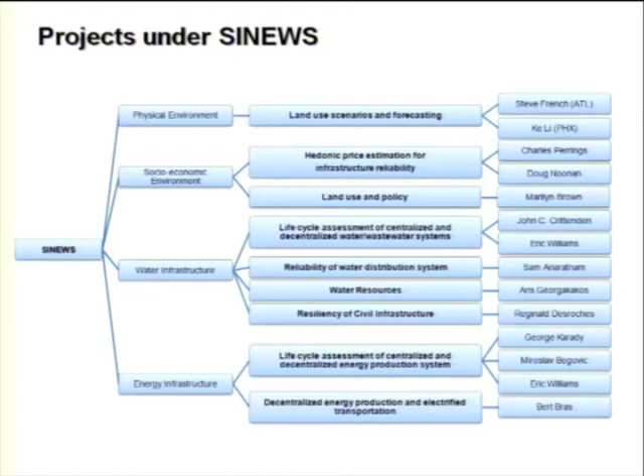There was a study conducted by the National Center for Atmospheric Research. DOE commissioned them to run their climate model and ask the question: how much would we have to reduce carbon emissions to avoid the most catastrophic problems associated with climate change? And the answer was 70% by 2100, 30% by 2050.

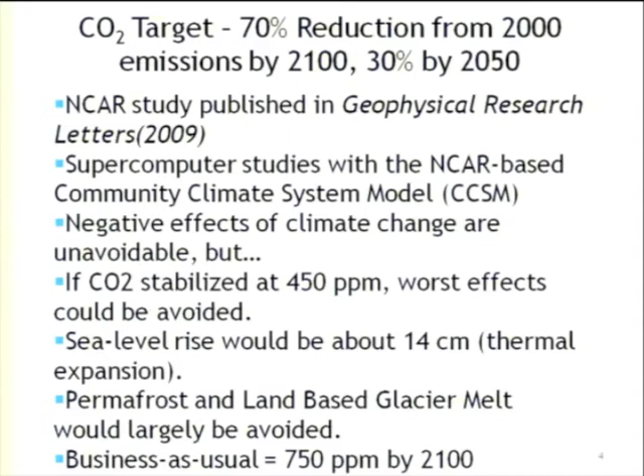What that means in terms of energy reduction is shown on this slide here. Right now we're about 13 or so terawatts. We'd have to reduce this to about 3.2 terawatts of carbon-based energy.

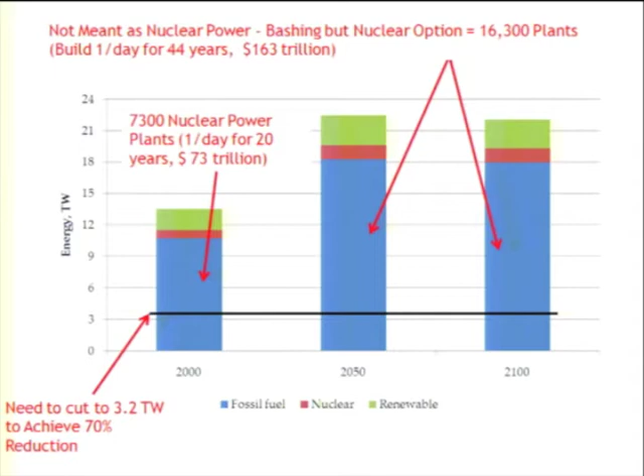Just so we have a good picture of the other side of the coin, it takes energy to create the materials that we use. You can see this here. We've got it broken down to oil and coal, and there's a magic gigaton line right there, 1 gigaton. Oil and coal is up here, steel, aluminum, copper, zinc, all the way down the chart in terms of metals that we might use. You may notice that I've also got here the amount of energy that's required to produce these materials.

One of the biggest ones up here is steel. Also over here I've got it broken down in terms of polymers. Maybe the numbers are smaller in terms of the production as well as the energy use, but I've reported them in here as well. For ceramics, taking a little liberty calling concrete a ceramic, you'll notice the energy use is quite high for that, as well as glass and bricks and so on. And then fibers and hybrids over here on the right. Maybe wood we could consider renewable, and some of the other materials we use in our society.

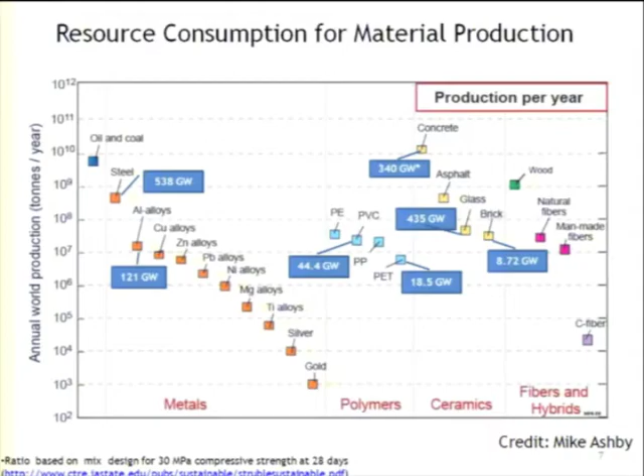This slide here, if we look at material use, we use about 14 gigatons of material, and the problem is only 5% is renewable. In the long term, it's going to all have to be renewable. And I'll call out one more from here - this is the carbon from fossil-based fuel, about 8 gigatons. So the gigaton problem really is about reducing the amount of non-renewables for the material use, and we have to reduce the carbon-based energy by 70%. So that's a tall order.

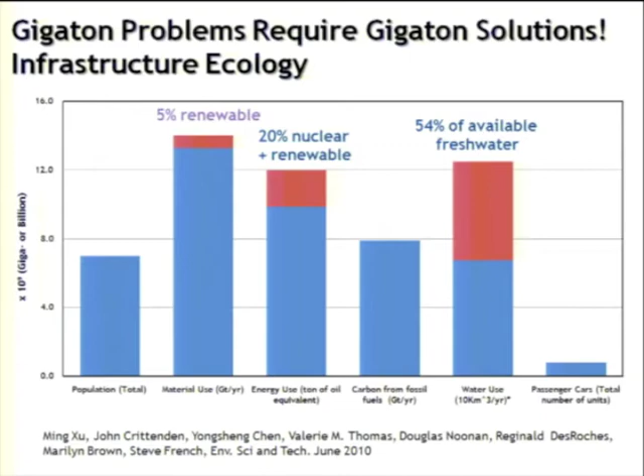And what I mean by a gigaton solution, or we need a gigaton solution for this, is that if we solve a problem - let's say we deal with 1 million tons rather than a gigaton - we need many, many solutions in order to have that add up to a gigaton.

Let's talk about material and energy challenges we're facing. I broke this down into two categories, energy and materials, since materials and their refinement require energy. The question we face in the future, and I don't know the answer, is whether it's better to develop green energy production systems or implement existing renewable energy systems.

There's a saying that fusion has a great future and always will. Maybe. Just to give you an idea what I mean there. And for materials, do we refine existing technologies that use less energy and materials? For example, can we improve concrete, plastic, steel, aluminum, glass production? Or develop new materials and greenfield technologies that use renewable materials? So this is a challenge.

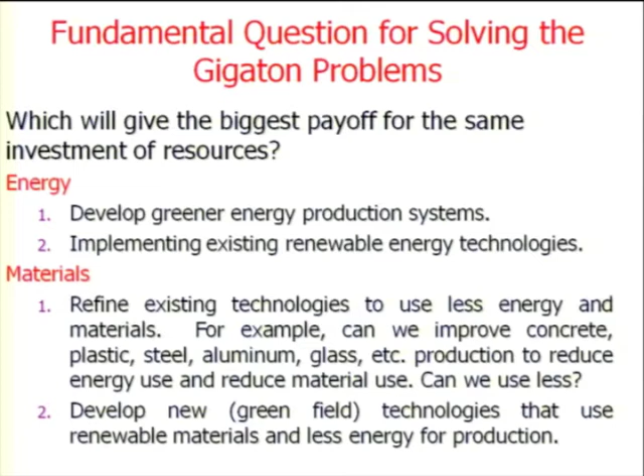I can show you a comparison that may be of interest when it comes to energy production for various industrial sectors. As you may know, China is rapidly becoming, or perhaps is, the factory of the world. You can see here the energy intensity in megajoules per dollar in various sectors, and across the board China is definitely using less efficient technologies in terms of energy use to create value in these sectors.

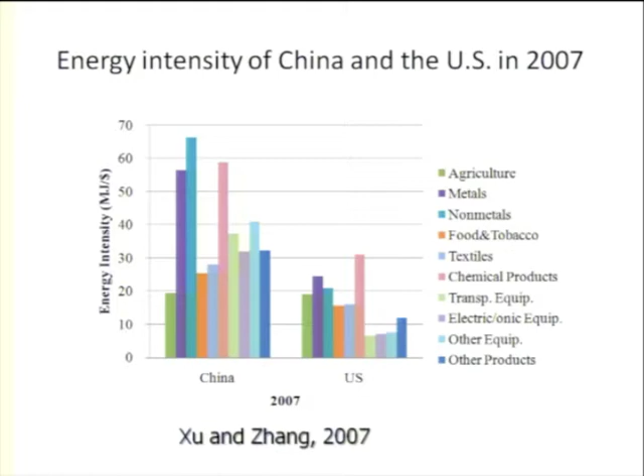This raises a question: how far can we go? Can we go even lower in terms of our energy investment to create dollars in these important sectors? Roughly speaking, it's about twice as much energy needed in many of the Chinese sectors. The only difference is agriculture, which is pretty similar.

Okay, so let's talk about how we might move forward to produce energy in a more renewable way. I'll get to the water energy nexus soon. There was a study reported in Scientific American about how we might create 11.5 terawatts of energy using wind, wave, and solar energy.

The numbers are here: 51% by wind, which would require 3.8 million large wind turbines, with 0.8% in place. It would require 1.7 billion rooftop PV systems, less than 1% in place. Concentrated solar plants, 89,000, plus some hydro as well. I labeled this World War II because the authors looked at the industrialization effort required, and it's equal to World War II.

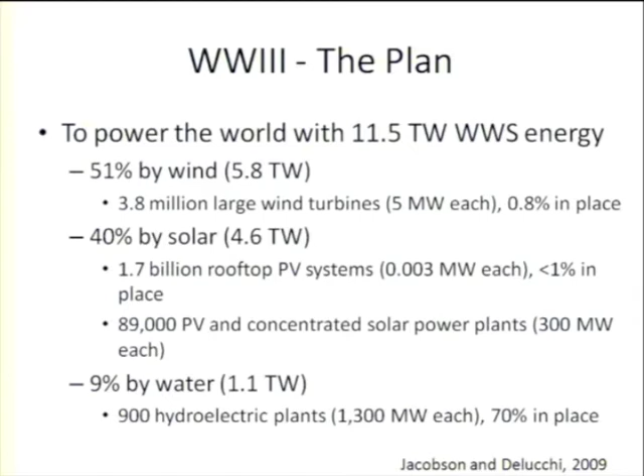I don't see the political will at this point for us to engage in such an effort, but it's certainly an interesting idea. I call it World War III because, unlike World War II, when it comes to climate change, we are all going to be winners or we're all going to be losers.

I got this slide from Paul Denholm looking at the renewable energy resources out there. You can see wind, concentrated solar plants, and photovoltaics and their adoption across the U.S. There's quite a bit of opportunity out there, and in terms of theoretical potential, we can easily obtain the energy that's required.

One of the main points Paul makes is that in order to do this, we need to solve the storage problem, and that's an important issue, as well as distribution. Later in our seminar series, we'll hear about the smart grid as it relates to that.

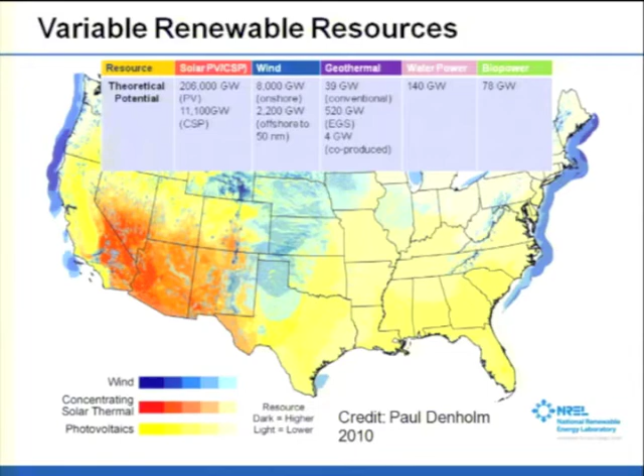Now, in terms of another renewable resource that I don't think has been fully exploited, it's hydropower. We have about 82,000 dams in the United States, and only about 3% of those are being tapped for energy production.

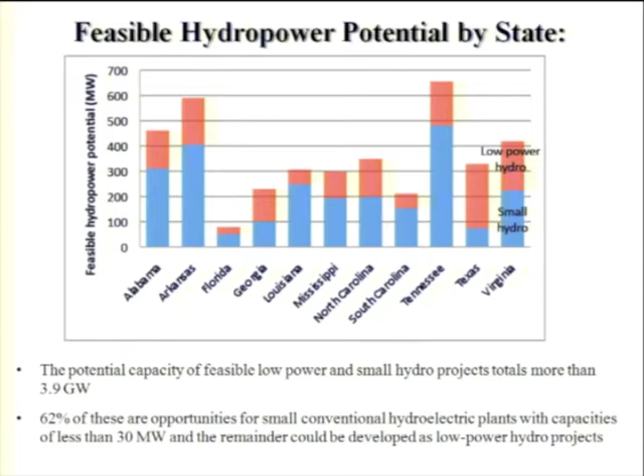Here we're talking about half of that by just dealing with some of the smaller waterways that we already have dams on.

Now I'm going to get to the energy-water nexus. I'm talking about urban systems. When we think about urban systems, in this group we've been talking about the water-energy nexus, but I'd like to expand that to water, energy, transportation, socioeconomic nexus. All of those things together are what cause the demands for water and energy that we currently experience.

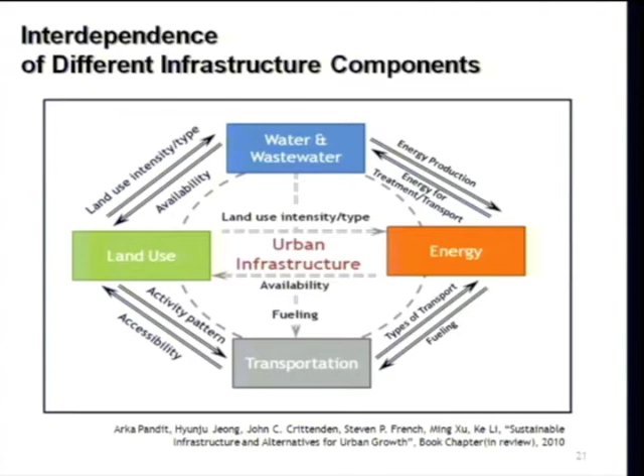The key thing here is really the land use and intensity type, because this determines how much water and wastewater we have to deal with. It determines the stormwater aspect, so land use is a very important piece of this. We need energy to produce water, we need energy for transportation, and also, as we pointed out earlier, we need water to create those transportation fuels. I have a slide or two on that in a moment.

I think there's a tremendous opportunity moving forward as we redesign our urban systems to use less energy and water. This little graphic shows that in the next 25 years we're going to invest $41 trillion in new infrastructure. The way we've designed this infrastructure in the past is that, if I'm from the transportation department, I optimize that; if I'm from the water department, I optimize that; if I'm in energy production and distribution, I optimize that. But there are synergies between these.

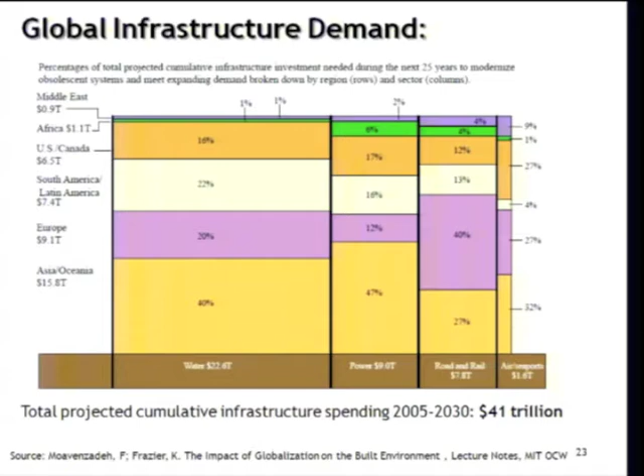The idea is that if you look at all of them and their interactions, one could design your urban system to use less resources. That's really what our project is all about. You can go to our website and get more information in terms of the progress we're making moving forward.

One concept, just to illustrate this, is what I call infrastructure ecology. We've heard about industrial ecology before, but the same thing applies to infrastructure, in that there are interactions that can occur that reduce the amount of materials and energy that might be required.

One example is combined heat and power. Suppose we had distributed power generation throughout the urban system, and then we could recover the heat from that and use it for heating buildings and hot water, or perhaps even air conditioning. You can see what kind of efficiencies you might be able to achieve.

For example, if we have a large centralized electrical energy production facility, for every 100 units of energy we put in, at the plug we only get about 29% of that. Versus, if you had the ability to capture that waste heat and use it, you might be able to get as much as 85% of the energy—35% as electrical energy, and then some useful heat, about 50% of that.

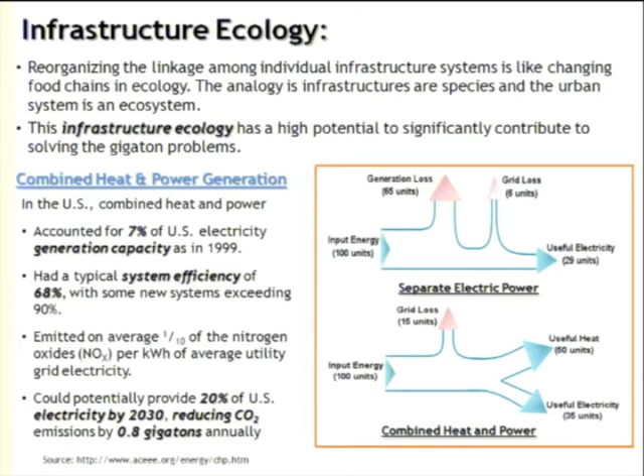So the idea of combining systems and looking at how these systems work together starts with urban planning, and from there, looking at more compact housing developments is an important part of this.

Now I'll start talking a little bit more about some of the numbers for energy for water production in the U.S. Across the U.S., only about 4% of energy consumption is for the water and wastewater sector. In California, the number is considerably higher because they're taking water from Northern California down to the desert, known as Los Angeles, and also water from the Colorado River to the city of Los Angeles. Some of the numbers you can see here depend on the water treatment—surface, ground, brackish groundwater, or desal—you can see the kilowatt hours per million gallons required. So often surface waters are preferred; with groundwater, we sometimes have to remove metals and other things.

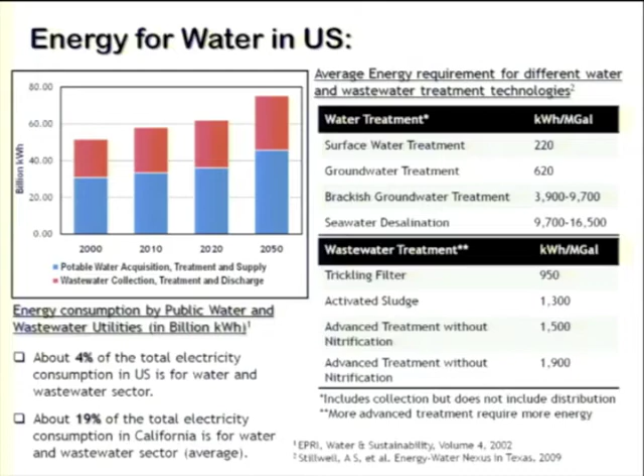Then for wastewater treatment, depending on the technology you have, you can see the variety of energy that might be required in kilowatt hours per million gallons.

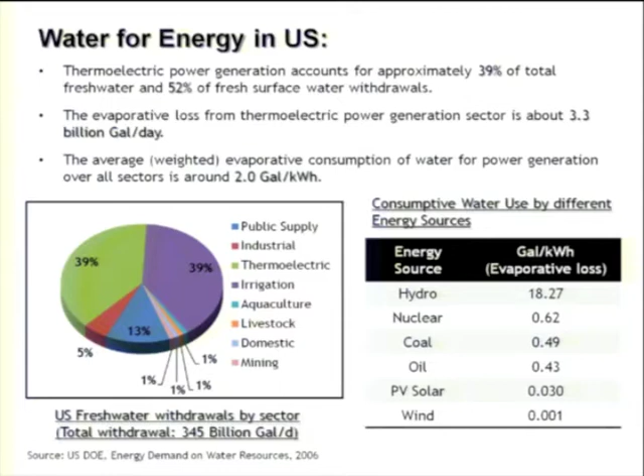So that ranks at the top, with nuclear number 2, oil, and then PV and wind do use water because you need water to produce some of the materials that are invested in the PV and wind power devices.

This is something you may not have thought about, and that is water for transportation. There's a connection between urban planning, the transportation networks, and the water demand that would result from that. This shows a number of different fuels, and the low and high end of water in terms of gallons per kilowatt hour.

One of the highest would be corn ethanol, cellulosic ethanol, and others, depending on algae and so on. It also involves some important issues, whether you irrigate it or don't irrigate it, which obviously makes a huge difference in terms of how much water is required.

Over here on the right, you can see what we're really interested in: gallons of water consumed per vehicle mile traveled. The solid part is embodied in the vehicle, and the gray area is embodied in the fuel, and the drivetrain and method you use to make the car move depends on the fuel that you use.

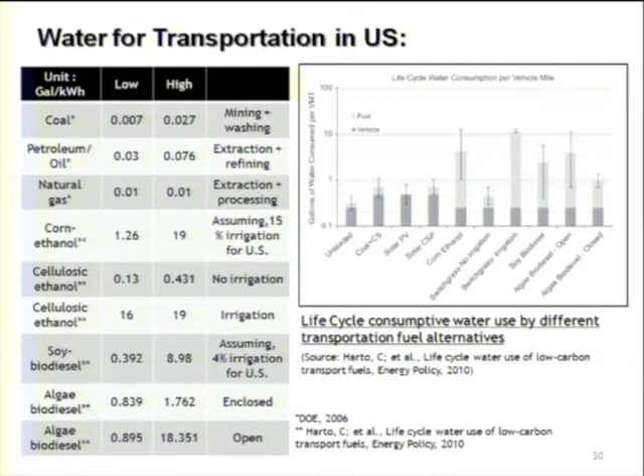You can see there's a little variation in the amount embodied into the vehicle itself, but also a tremendous difference in the use phase depending on what we're looking at. There may be some surprises here - switchgrass with irrigation looks like the highest, and unleaded gasoline looks pretty good. I think we already heard that earlier today.

Our project really involves looking at both Phoenix and Atlanta, and it's an interesting contrast because we have different physical landscape, temperature, etc. Some of the numbers are pretty interesting.

The indoor water use in Atlanta is higher than Phoenix. Outdoor, you would expect to be much higher - it's an arid area, and people still like to have green lawns and green landscape.

The residential energy production, kilowatt hours per person per day, is pretty comparable, I guess. For fuel, a little bit more here in Atlanta - maybe we're spread out and driving a little more, trying to get around.

In terms of water consumption for electrical energy production, gallons per kilowatt hour, it's a little bit more in Arizona as compared to Georgia. In terms of water consumption for water supply and wastewater, the numbers are dramatically greater - you have to take water from Lake Havasu over to Phoenix via the Colorado River, so the number is quite a bit higher than it is here in Atlanta.

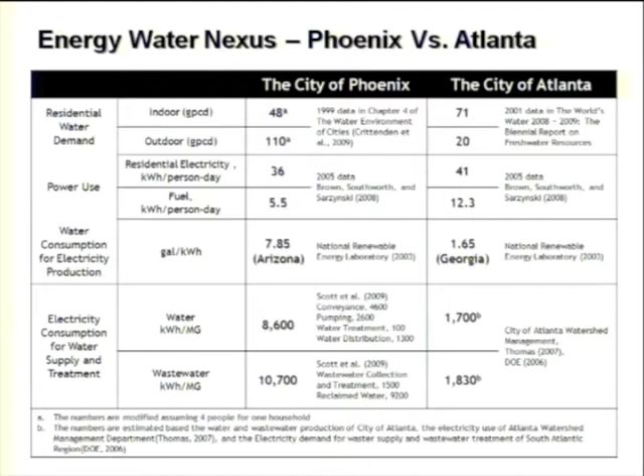And in the case of wastewater, the numbers are much higher than in Atlanta. So it's an interesting case in point comparing the two cities. Phoenix is certainly spread out as well.

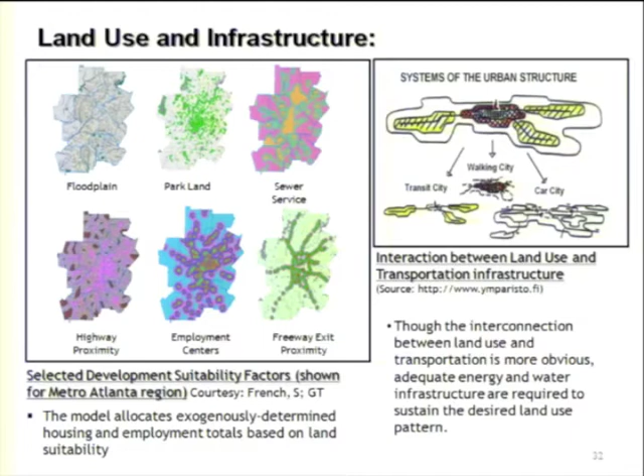One of the things we're working on is trying to simulate how land use would change and what the policy drivers might be for that. Here you see some of the attributes we've mapped out - we actually have information on 1.3 million parcels in the city.

Using a land use model, we can run models like this to compare business as usual scenario versus compact growth scenario. Obviously this will have an impact on water and energy use, as well as for transportation, et cetera.

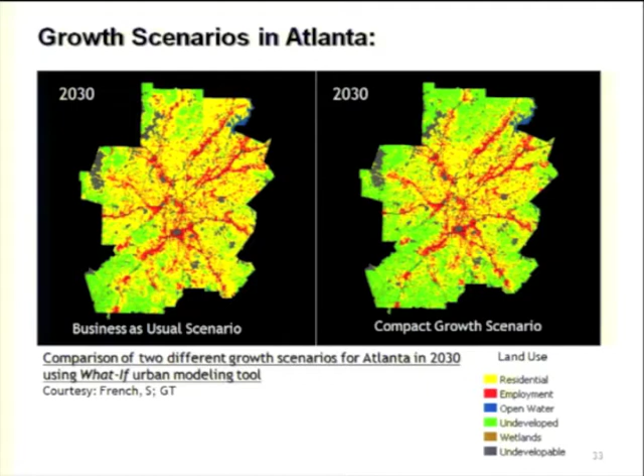I wish I could show you what the result is, taking this one step further and saying the energy use for this one is less or different than the energy use for this one. But our hypothesis is that distributed, decentralized water and energy production might have an advantage in terms of resiliency and efficiency.

Let me just skip over that. There's this concept called low impact development. We're really getting close to running out of time here, but there's a variety of technologies we could look at that would reduce the amount of water that we use.

Certainly green landscaping. In Metro Atlanta, one of the problems we have is stormwater, and it's been estimated that if we increase the tree cover from 29% to 40%, we might actually reduce the storm runoff by 20%.

One thing I didn't mention: in this compact living area, if you have compact living, so people occupy one building, you're going to have more green space. You can use that green space for what's known as blue belts.

The blue belt is where you're trying to control the stormwater and perhaps reuse that for purposes of fire, or even using it for landscaping and the like. So another one that would fit under here is rainwater harvesting.

Under water reclamation or wastewater reclamation, it turns out you would actually use less energy. Rather than having a centralized plant, our whole city has been built on the Romanesque idea of large pipe thinking, and that's served us well. Basically, you scrape off the ecology, put your buildings in there, hardscape, and that creates a stormwater problem you have to deal with. So there's some issues there.

And also there's an issue about phosphorus. We don't have an unlimited supply, depending on whether or not we think Morocco will really be a good source of phosphorus - we might have 200 to 300 years of phosphorus left. So at some point, sending phosphorus in a dilute concentration into the ocean might not be the best idea. We also have efficient small fixtures and water sense products and so on.

All right, other opportunities. Energy for transportation, the story here in Atlanta - we are going to also do the water for this as well, but here this shows the megajoules per person kilometer for the various strategies: gasoline, diesel, compressed natural gas, E85, various kinds of hybrid vehicles. So this is the energy production.

And then over here, this is the CO2 output per person, in grams per person kilometer. It seems I've lost the most important one - this is MARTA over here. That's the worst, and the reason MARTA is not so good is that

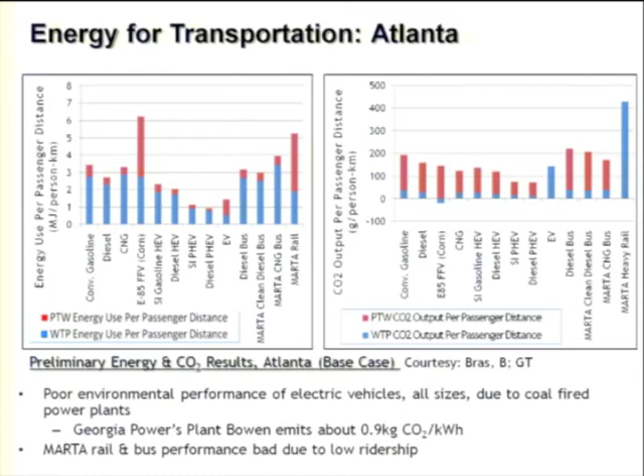the ridership is low. And also, a lot of the electric vehicles don't look as good as just a standard conventional gasoline vehicle because of the poor performance of the power plants here - the existing plants emit about 0.9 kilograms of CO2 per kilowatt hour.

Okay, just in time. A few concluding remarks. Well, not all news is bad.

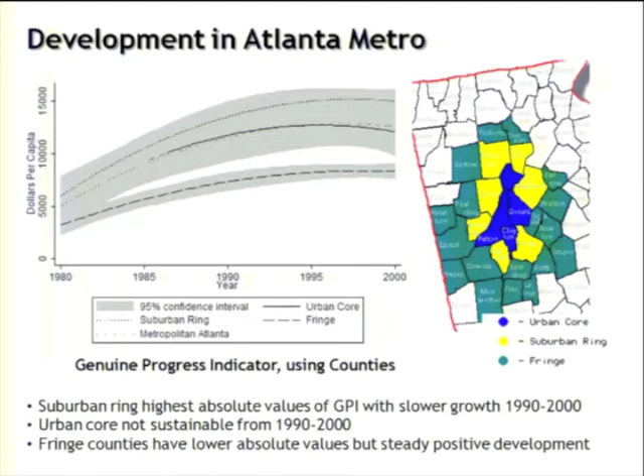And in case you don't really know what the genuine progress indicator is, I just want to say that it's a measure of 4 dimensions of sustainability, including economic, social, environment, and resources. So I guess you can study that graph and learn a little bit more after you go maybe Google the genuine progress indicator if you don't know what that is.

Well, my last concluding remark is this: we really need to recreate the anthrosphere that's the place we live, that uses resources that nature provides and generates waste that will not overwhelm natural cycles.

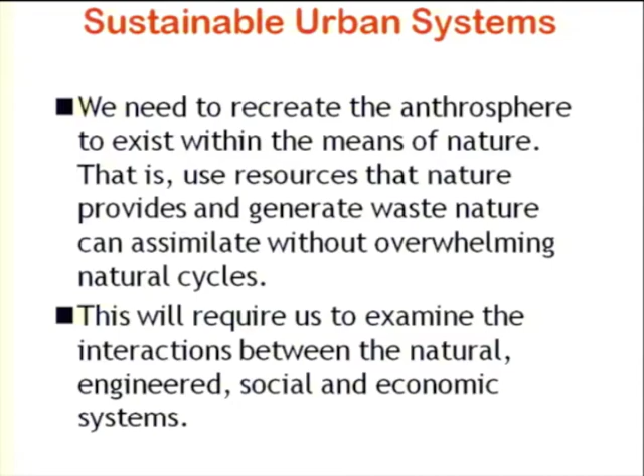And I can cite two where we're failing miserably. When it comes to CO2, we're emitting more CO2 into the atmosphere than nature can pull out, so we're failing miserably there. And when we talk about using renewable materials, we know we're failing there too - only 5% of the 14 gigatons of material that we use in the world economy is renewable.

I should also say, when I mentioned that gigaton problem, that problem exists for the golden billion - us. And if we really want to think from an egalitarian point of view, where everyone has equal opportunity, by 2050 there's going to be 9 billion of us. And so we better multiply that by 9.

So anyway, this will require us to examine the interactions between natural, engineered, and social systems. So thank you for your attention.

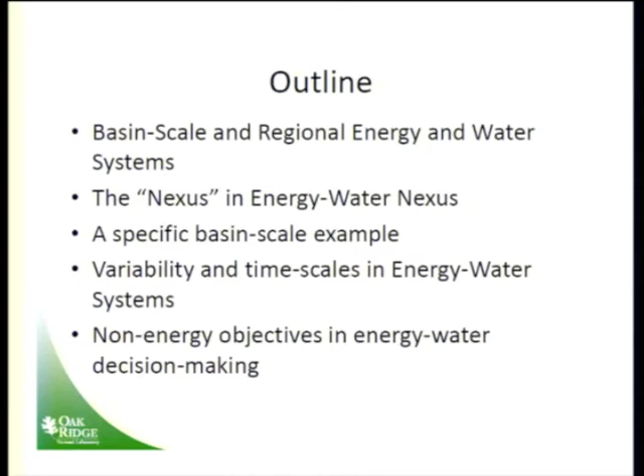Then I'll talk a little bit about how we have to think about and manage the variability and timescales in energy-water systems. And then finally, I'll look at how we have to think about treating non-energy objectives as we deal with energy and water systems and the solutions we have to think about developing in both the energy and water domains.

So just a little bit of background and a primer, I apologize if some of this is old hat for some of you. When we think about water resource systems, we're talking about inherent uncertainty in what the inputs of those systems are going to be. We're also talking quite a bit about conflicting priorities. That shouldn't be a surprise to anyone. And those priorities are conflicting at several scales, the metro, the local, and even the basin and national scale.

We have multiple demands on the river systems: flood damage reduction - my friends at the Corps of Engineers have taught me not to say flood control because we don't control floods, we just reduce them. Water supply, you've already heard quite a bit about. We have to make provisions for the ecology, and we have to manage how we provide for those things. We have to allow for commercial navigation, certainly in many river systems in the country. That's also how we transport things like fuel, whether liquid fuel or coal for power generation. Recreation and aesthetics come up oftentimes as we license and do assessments of energy, and then we have to deal with energy supply. Some of the complexities there.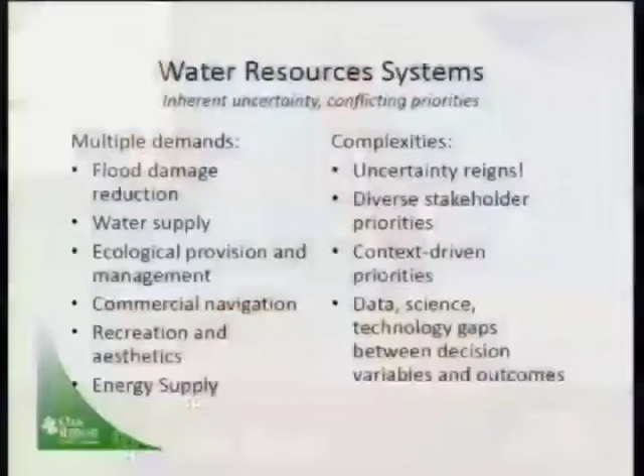Uncertainty, of course, reigns in those systems. There are many, many stakeholders who have diverse priorities. This perhaps is not always thought about, but those priorities are context-driven, so they shift. When we look at these different uses and priorities, when you're in a wet period, obviously flood damage takes priority. But when you get into a drought period, some of these priorities flip, and we begin to worry more intensely about things like water supply - getting people to have things to drink before, did we do that before we get them energy?

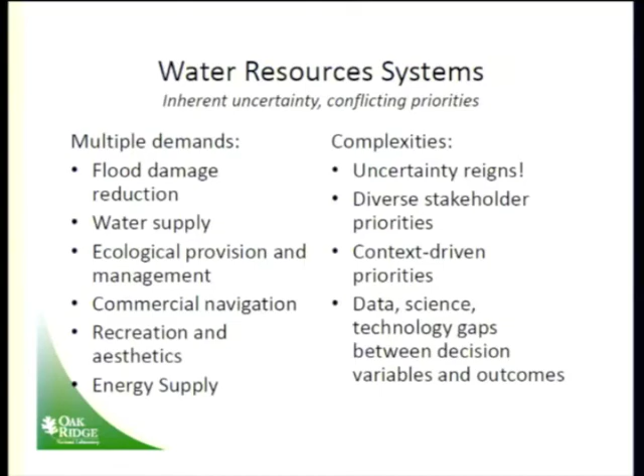These are the questions we have to answer, and depending upon the context we're in, both in terms of development and technology, these priorities can change. When we talk about energy systems and water systems and how they interact with ecology, we have many data science and technology gaps between the decision variables and the outcomes. Decision variables are things like, at the long term, whether to build or not a project, whether it's justified or feasible. At the shorter time scales, we're talking about when we release water and where we release it from, and what elevations we hold in reservoirs and streams.

Just real quick, a very basic slide on hydrologic units for future reference. Here's the South Atlantic region, and then we have the Tennessee region right above that, and we'll speak about those two things. Just to give you a sense and remind everyone about the hydrologic structure that we deal with in the U.S.

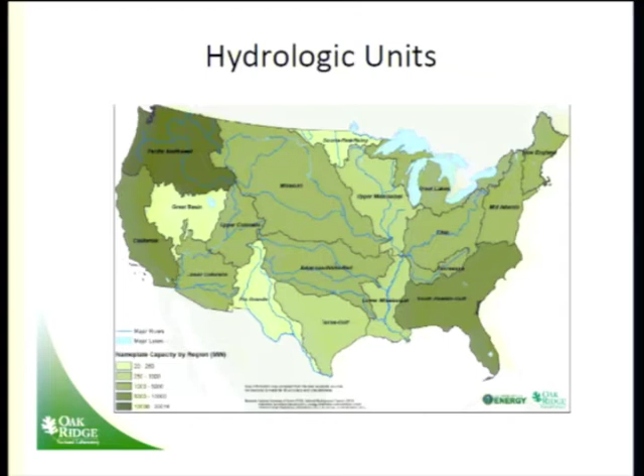Electric power systems, the other side of the energy-water nexus, are characterized by evolving and emergent complexities. We've been going for many years with baseload energy and hydro supplying our needs. As we add things like wind and solar that have variability, both spatial and temporal, we begin to get different behaviors depending upon the demand, the supply, and the resource for those generation sources. There are many behaviors we're only now beginning to understand in terms of joint variability. Does the wind blow when the sun shines? Does the wind blow at night? How are those correlated with water flow, for example? So we have to understand those emergent behaviors of the generation sources, and that's a source of complexity.

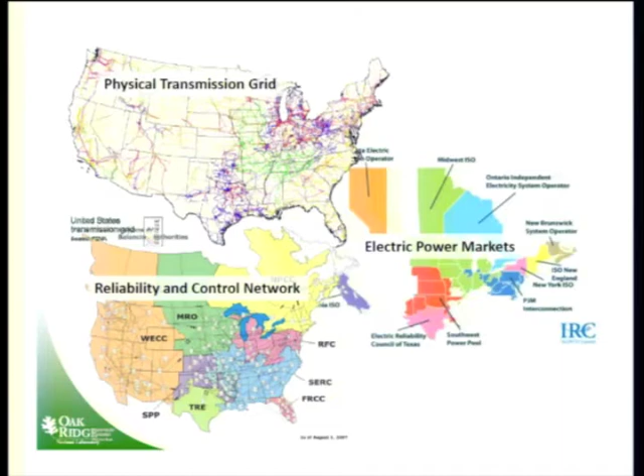Those markets drive the developer behavior for the generation mix of renewable technologies. They affect how much does it cost to bring in wind energy, how much does it cost to bring in solar energy. They affect the revenue streams that affect the financing that get those projects built.

So, water for energy linkages, a few things that I'll talk about. In nuclear, of course, we have cooling water requirements. You saw a lot of detailed numbers before on those per megawatt hour and per megawatt. We have waste assimilation, even at nuclear plants. For coal-fired generation, we have cooling water. We have ash handling and waste assimilation. We also have emission control systems on coal.

At the extreme, of course, there's carbon capture and storage and the water intensity of that. But we also have things like scrubbers.

An anecdotal story: every day when I go to work at Oak Ridge National Laboratory, I drive by Bull Run Steam Plant, which is about a 965 megawatt coal-fired steam plant that TVA runs. It's a once-through cooling plant, so it had very low consumptive use, lots of once-through use. They now have a scrubber to control their emissions. And now every day, 24 hours a day, there's a huge plume of water coming out of the top of the emissions control equipment as they scrub that, and that water goes up. So they've reduced their air emissions, but now they've increased their water usage.

So we have to be mindful of that. And to my knowledge, that is not an area of water use intensity that's received a lot of attention yet. There are people looking at it, but on a regional and national basis, that's an issue that needs some more research. Of course, if we do combined cycle, we have to cool that, so there's cooling water demands there.

And when you look across the country, and even in the Southeast, as non-federal plants are relicensed, they typically lose flexibility. They lose capacity factor. And so we don't get as much energy or flexibility for a robust power system as the policies and the constraints that govern hydropower operations are put into place.

Of course, there's bioenergy. You heard a little bit about crop irrigation. We have to think about that, the water demand for the refining process.

If we use that in the steam cycle to power that, then we have to look at cooling water there as well. I put a brief picture up here to show the hierarchy that has to be in place typically in a hydro and a power system, where individual units have to be dispatched at the proper efficiency to make the best use of the fuel, whether it's water, coal, or nuclear. Then we have to select across units and select the right unit commitment and mix of units to get the most efficiency at a given power plant.

First, we have to select how we move water through the system in hydro plants. But in the southeast, we also have to think about how we move water past thermoelectric plants for cooling water demand. It's a big issue, certainly in the Tennessee and Cumberland rivers, and I suspect it's an issue that can be improved in other river basins as well.

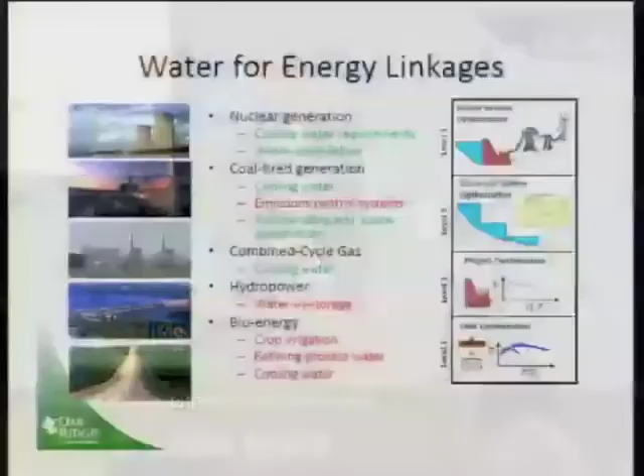And then as we have an evolving mix of renewables, we have to think about how the penetration of renewables, whether it's wind, solar, or other variable renewables, will change the way we dispatch and commit thermoelectric units and hydro units. And so that'll change the efficiency of the entire system. These are issues being studied within DOE programs - the wind program, the water power program at the Department of Energy, and the solar program as well.

This slide comes to us courtesy of TVA in 2010, from their financial reporting, where they did some analysis looking at the different utilities across the southeast. What we're showing here is the percent of those utilities' fleet or capacity that's going to be retired on this side, and the new generation that's planned in the 2010 to 2016 timeframe.

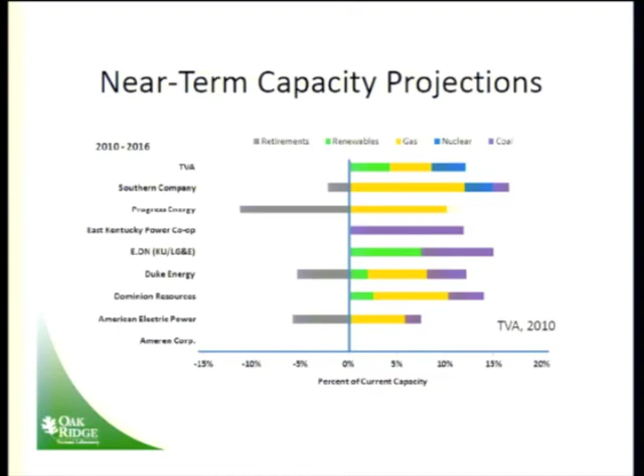This is important to think about because we have renewables here in green, gas here in yellow, nuclear in blue, and coal in purple. So you can see a mix of water demand here in the near term for generation build-out. If, for example, we replace coal with gas, we may see a water reduction there. Certainly if we see a growth in coal, you're going to see more water use there. So there's quite a bit of near-term shift in water usage that's going to occur in the generation sector across the southeast.

So let's get specific. What are we talking about with thermoelectric cooling water? Well, here we've got a once-through plant, a very large power canal that pulls water into the plant and then discharges that water once through. There are temperature and environmental constraints on that water that have to be managed from day to day and even hour to hour in some cases.

As we learned in the most recent drought in the southeast, that doesn't always work so well. Sometimes these plants can literally be shut down when the water is unavailable, or when the assimilative temperature capacity of the water is unavailable - when the water is hot and there's not enough flow in the river to assimilate the heat coming out. So we have constraints on generation, and we also reduce the efficiency of generation when that happens.

This is a generic plot, but it's typical of a steam cycle power plant, where the percent of full load - we start out here at 100% when everything's nice and cool in the river and we're pulling water in. Then as you get higher and higher temperatures, you begin to degrade efficiency. You reach a break point in terms of the mechanical operation of the equipment inside - the steam condenser actually has to start scaling back your heat input.

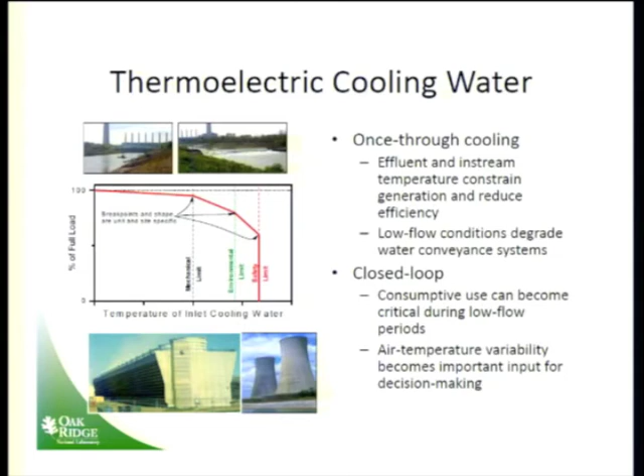You drop further, and then if you're a nuclear plant, you reach a safety limit in the river where you literally have to shut down to ensure at all times you can safely shut down reactors. These are real constraints - they're affecting current plants, they're affecting proposed plants that are going in. Here we have cooling towers with consumptive use.

That can become critical, particularly during low flow periods. Also, when we go to cooling towers, we trade water temperature dependency for air temperature dependency. And if we're looking ahead toward increased variability, we have to be worried about air temperature variability as well. The ability to forecast the performance of either the once-through system or the closed cycle cooling tower system is critical from hour to hour and day to day to manage ourselves through low flow drought periods. We've seen that over and over again in the Tennessee River system and the Cumberland system, where we get into these low flow periods, and the alternative is to overbuild on cooling towers. That increases our capital cost and the cost of energy or electricity for thermoelectric.

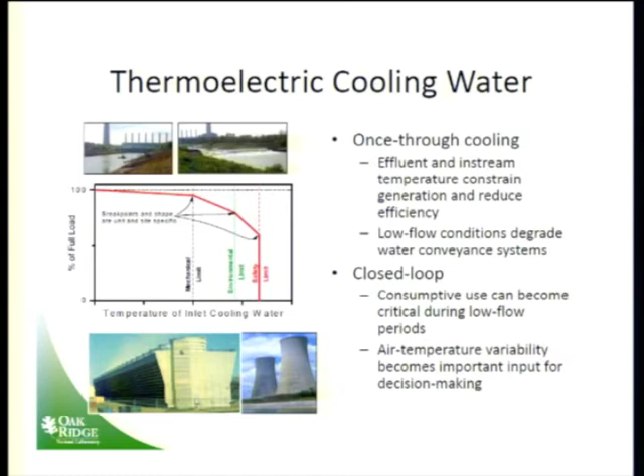So, additional details. Here's an interesting plot that I put together. This is the Tennessee River at Chattanooga. You have two nuclear plants sitting upstream of this location, and one major nuclear plant in the TVA system sitting downstream. This aqua hump is the historical water temperature at this location with the minimum and maximum plotted. These lines running through are particular single-year trajectories through that system. You see quite a span of temperature variation from the min to the max history. The blue plot is water flow, river flow here. So you see the challenge we have in the southeast with thermoelectric and water availability and temperature availability. We have high temperatures, we have low water flow, and so we get the loss of an ability to assimilate that heat.

And if we get an extreme temperature up here, we get an extreme low water flow down here, things have to shut down. This problem is getting more and more complex to manage as we look ahead toward climate variability and increased variability. It's also getting harder to manage as we look at increased constraints on water use in the system. So even without climate variability and changing climate, we have increasing pressure on this kind of system to keep everything running through the low flow periods. These are some typical temperature limits here and other extremes that, when we get above these things, operations have to start changing.

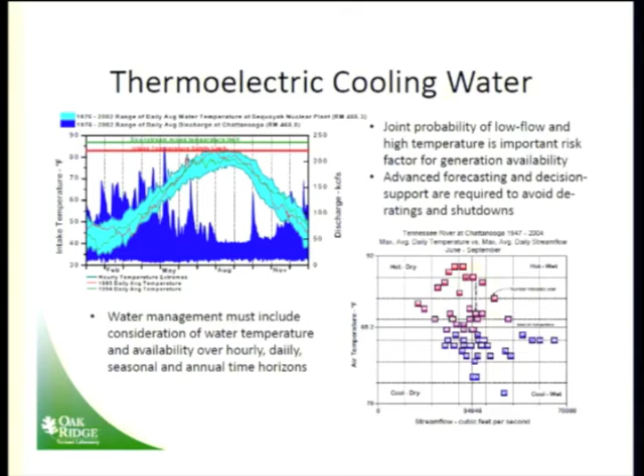Here's a typical way that a thermoelectric plant or utility would look at these things. We've got water flow and air temperature on two different axes. When we have hot, dry conditions, that's when we get into trouble. When we have cool, wet conditions, that's usually not so much of a problem. When we think in terms of climate variability, we're talking about whether this map starts to change over time, and whether we see shifts going on. That's when we begin to worry and have to start thinking about adaptation of cooling tower designs and things such as that.

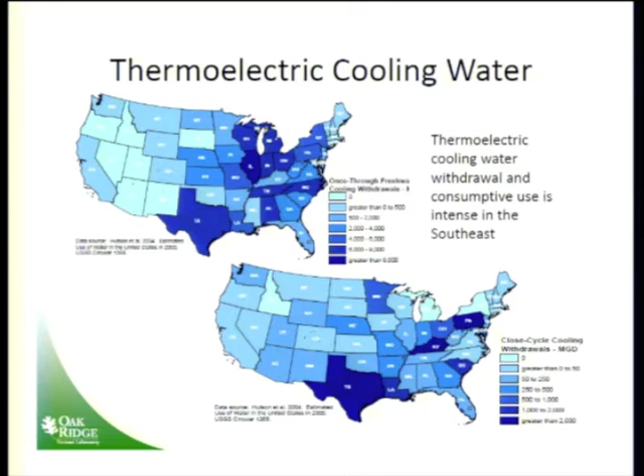I'll skip over this, just a real quick slide on water and intensity of water withdrawal. This is based on 2000 data, so it's a little dated at this point. But you can see, both in terms of once-through and consumptive use, we're fairly intense in the southeast, no surprise there, because of the large number of central thermoelectric stations that we have.

Hydropower. What are the issues with hydropower and water energy? We have an aging infrastructure in the southeast. Our Corps of Engineer facilities in the Cumberland, Georgia, and Alabama are getting older. They need investments in the infrastructure to make them reliable. As I mentioned before, we're getting increased water management constraints that limit the flexibility and the value of hydro as a dispatchable asset. However, environmental technologies are emerging.

Some new things, I won't go into details, but things like oxygenation, aeration of water, re-regulating flows to provide minimum flows automatically. And as you heard before, there are some small hydropower opportunities on non-power dams, potentially on some greenfield sites. What we're finding, however, as we look toward publishing a new report on small hydro opportunities, is that most of the opportunities are at large main stem navigation dams. You look at the energy available nationwide, 60% of it is at these very large dams. The remaining 40% is what's distributed out at the very small dams.

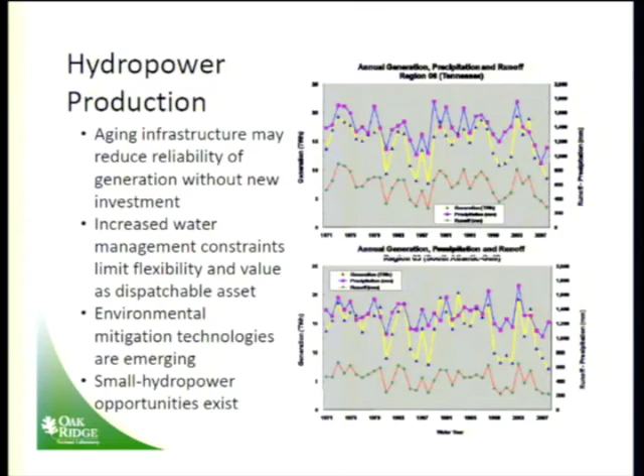These two plots are shown just for the Tennessee Basin and the Atlantic seaboard basins. It illustrates the point that we've confirmed: hydro production over the years tracks closely with runoff. It does not always track with precipitation. So it means we need to continue to do a good job of accurately predicting runoff. And if we start to see changes in things that affect runoff at the basin scales, we're going to have issues with hydro production.

We need to stay on top of that as an electric utility industry, as consumers, as water managers. A real quick example, since time is short here, but this is the Cumberland Basin.

It discharges into the Ohio. It sits atop the Tennessee River Basin. It has several Corps of Engineer dams that produce hydro that's marketed both to TVA, and some of the hydro goes to utilities across the Atlantic seaboard. There are two large thermoelectric plants on the river that are once-through and depend upon water.

We've mapped here, this was a project we did a couple of years ago, mapping the blue water flows through the components of this system and the different uses, and the red being the energy movement through those systems. One of the key issues is that there are different boundaries for the water system and the energy system. So while we don't have much interbasin transfer of water going on here, we have quite a bit of transfer of electricity from that water going out of the basin.

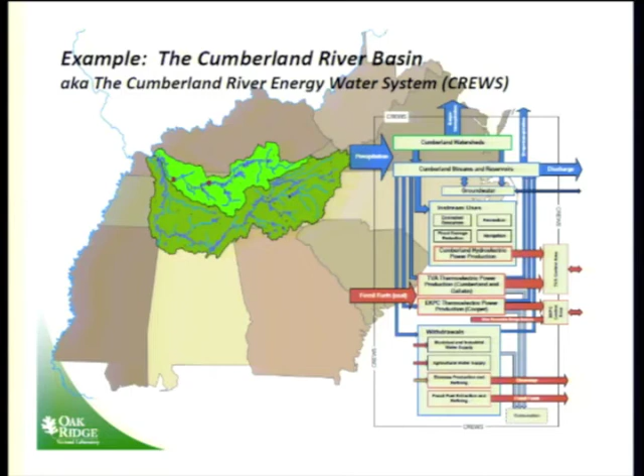So when we talk about the energy-water nexus, one of the real challenges is alignment of the boundaries of the energy and water systems. And if we are trying to do balances on energy and balances on water and compare the two, we really get into what are the boundaries for that system.

Just a quick slide on different institutional perspectives from that study. You had the Corps of Engineers and the way they managed the system. They also managed it for coal, to move coal through the system. TVA uses that system for some hydro flexibility. This is the Southeastern Power Administration, and they market the power.

Here's the Corps of Engineers administrative districts, and then we have 305 and 303 lists of impaired watersheds that impact the things you can do both with moving water through those systems and things you can do with effluents into those systems from energy production.

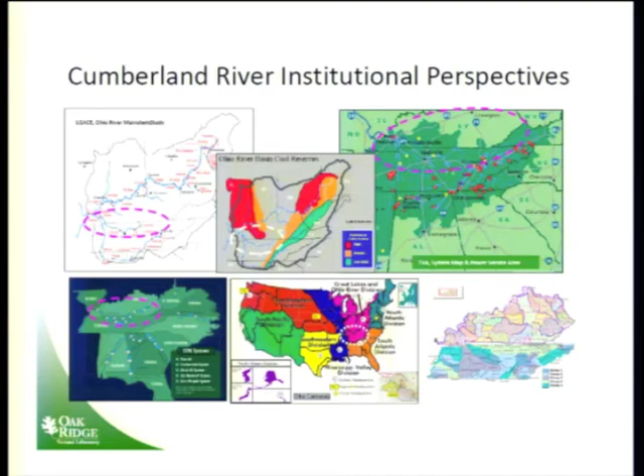I'll wrap up with this, or close to wrapping up with this slide. One of the important things about the energy-water nexus is the concept of temporal variability. I've put together a logarithmic chart here going from fractions of a second all the way out to centuries. If we look at the physical system, the geomorphology in the river systems, the water use, the movement of water quantities through that system, they span a certain range of time scales.

Then we can lay on top of that the ecology of the system, from individual organisms through populations and their responses. Those range from very fast responding organisms to long-lived species that can respond over a century. Sturgeon being one example of a long-lived fish. And so they evolve and respond over those time scales.

Then we get into the anthropogenic systems here with the detailed dynamics of power systems. Then we get into markets, both for energy and water, and we have those short-term dynamic and transient time scales that things can get screwed up on. Then we get into market scales of hourly and blocks of energy. And then we get into planning scales for planning new generation, planning new water infrastructure projects.

When we look at any particular slice through this at any particular time scale, you're cutting across these basic physical systems, the ecology, and the anthropogenic systems. And if we don't have models that can resolve things at those time scales, then we're going to have issues overlooking problems.

So this implies that we've got quite a tall order to develop interrelated or communicative modeling and forecasting systems that can transmit information across these different systems, so that we take care of the physical system and how we modify it, we take care of the ecology and how we affect that, and we deliver water and energy to people when and where they need it.

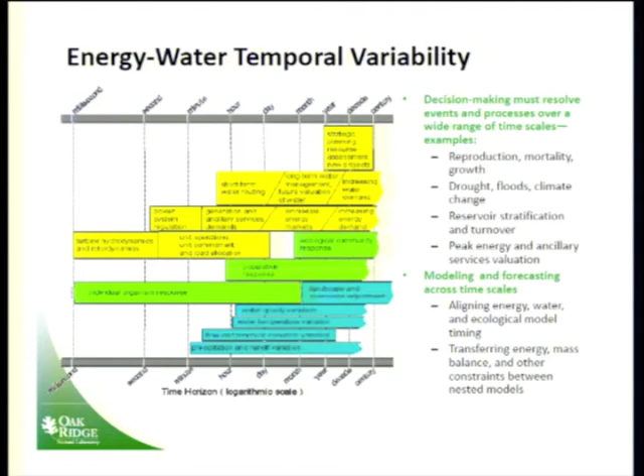This is a slide that shows the complex objectives when we talk about making decisions in energy, water, space. We typically work down here at this low level where we're dealing with water quantities and energy quantities, things that are fairly easy to measure. We typically, however, want to achieve objectives in terms of ecology way up here, making sure we have good ecological communities, healthy and robust reservoirs and river systems. So how do we make decisions?

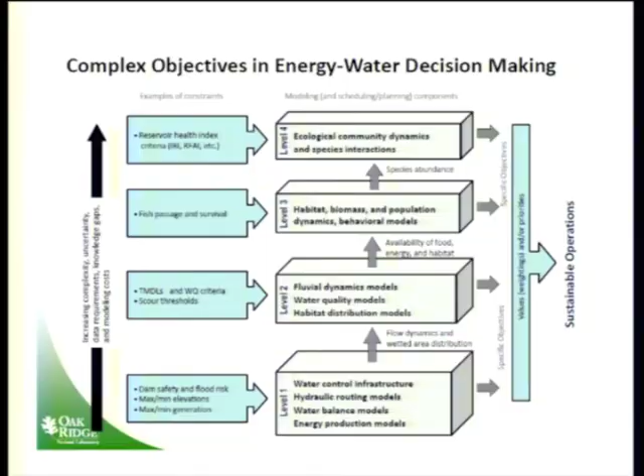Well, there's an array of built-up model complexity that has to be there to get us from the basic quantities moving through the system up to the result of, yes, things are healthy. Currently, when we look at scheduling operations, environmental assessments, relicensing plants, we're typically looking maybe at this level where we're doing water quality models. What we don't have are ecological models that are well integrated here that can allow us to make good decisions.

The mathematics here are far different than they are for energy and water systems when we talk about optimizing those. So there's quite a lot of development that can occur to marry these kinds of ecological models to energy and water quantity models. And I'll wrap up.

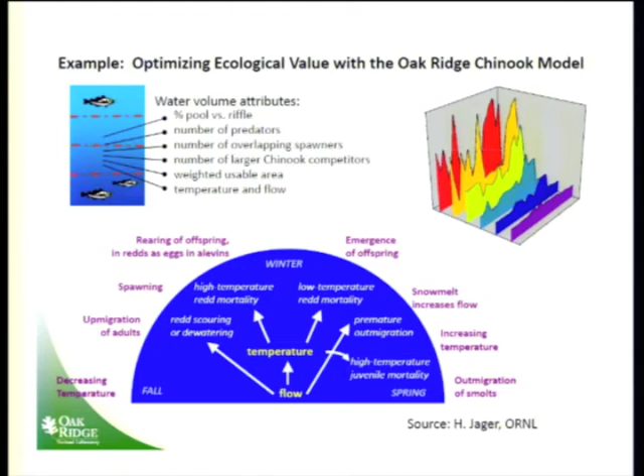Important takeaways: energy and water systems are connected across multiple timescales, and they have non-aligned boundaries. We already have examples of electricity flowing across hydrologic boundaries. Energy and water systems would benefit from joint analysis of operational and planning timescales. Water use trade-offs exist both between energy and other competing uses for water, and also between different energy technologies and which ones we use. The Southeast is very dependent upon water for baseload generation, and that's not going to change in the near term.

What are the trade-offs when we look at the main renewable being bioenergy? What are the trade-offs between baseload thermoelectric water usage and bioenergy water usage? And our ability to model the ecological implications of these types of decisions and choices is very limited, and we've got quite a bit of work to do there. And with that, thank you.